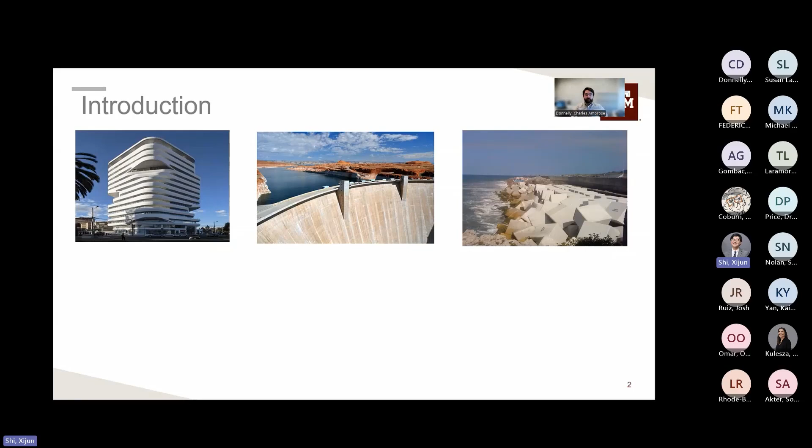As engineers, we're often focused on different structures that are key parts of our infrastructure systems, which affect the general public. These structures include buildings, dams, roadways, and coastal protection systems. A key component of all these structures is the materials we use to build them, and by far the most widely used material for construction is concrete. It's the most used artificial material in the world, with an estimated 30 billion tons of global production.

So any opportunity to improve concrete materials offers a great opportunity to improve the durability, performance, cost, and sustainability of structures, everything from a roadway to a building floor to a dam or levee section. So any opportunity we have to focus on that is great.

One thing we know about concrete is that it often requires additional reinforcement, whether that's steel rebar or, in many cases, fibers in the concrete to improve overall performance. Fibers are a proven technology used for a number of benefits, including controlling cracking due to plastic shrinkage, enhancing flexural and tensile strengths, improving toughness for long-term durability, delaying the formation and growth of microcracks, improving post-crack ductility, and bettering impact resistance.

Fibers have been around for decades in concrete in a number of different forms, ranging from manufactured steel fibers, like the one shown on the left, to naturally forming fibers, or synthetic fibers such as plastic or polymer fibers used in different applications. One common solution is metallic steel fibers, like the one shown, because they've been shown to improve the toughness of concrete and are very effective in resisting crack development and propagation.

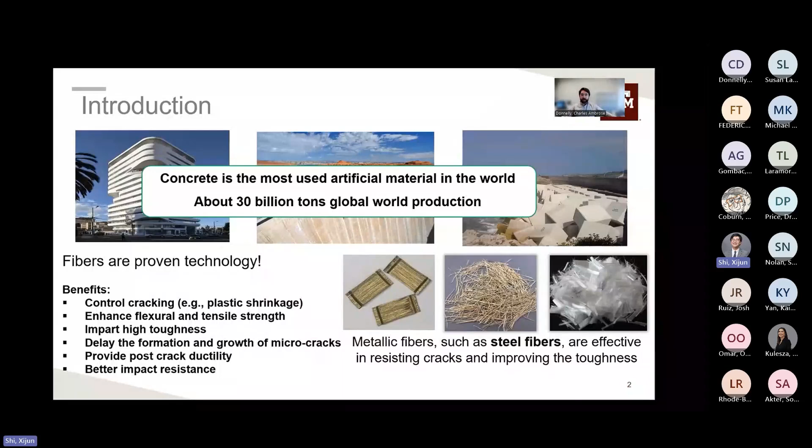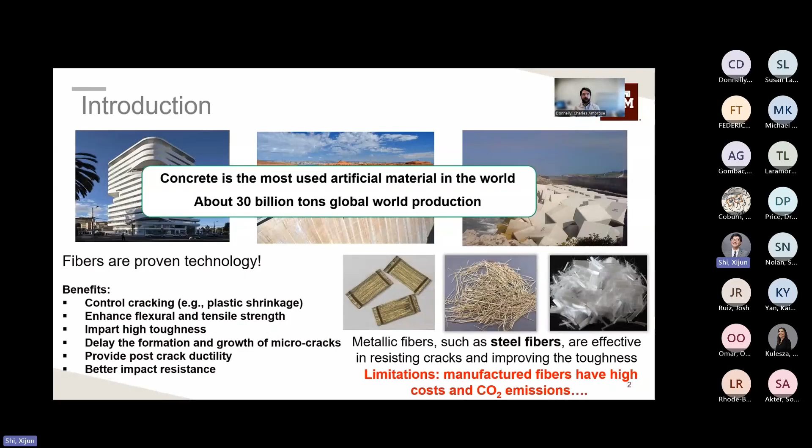Although fibers are great at improving many concrete material properties, there are some critical limitations, including the high cost associated with constructing sections with these fibers, as well as sustainability and environmental impact due to high CO2 emissions from steel fiber production. This is where Plient concrete comes in, because it offers a solution that utilizes the benefits of these fibers while mitigating some of the limitations.

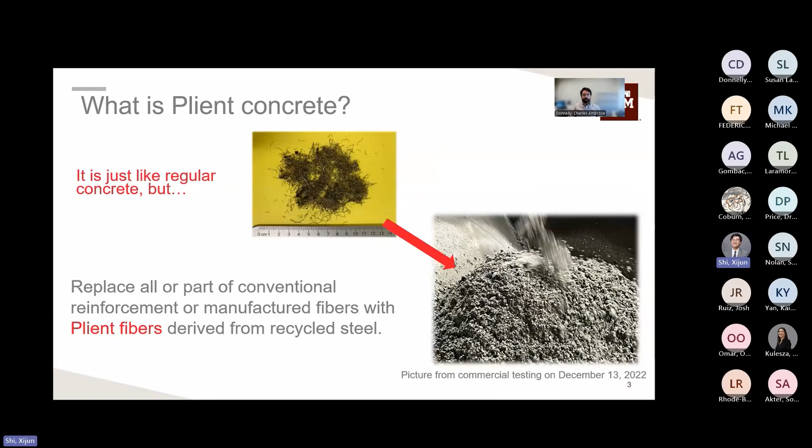So what is Plient concrete? Plient concrete is traditional or standard concrete which incorporates Plient fibers to offer all the improvements previously mentioned. Plient fibers are derived from a recycled steel product—here's an example of the Plient fibers—and they can be seamlessly integrated into traditional or conventional concrete to offer the benefits of different fibers.

So as I said, Plient fibers are a recycled steel product. Their composition is essentially almost entirely steel from the recycling process, but there's some residual rubber and textiles left over. There's a good breakdown on the bottom left showing a mass of the Plient fibers, showing fibers of different lengths and diameters made out of steel, with some residual rubber and textile interspersed throughout.

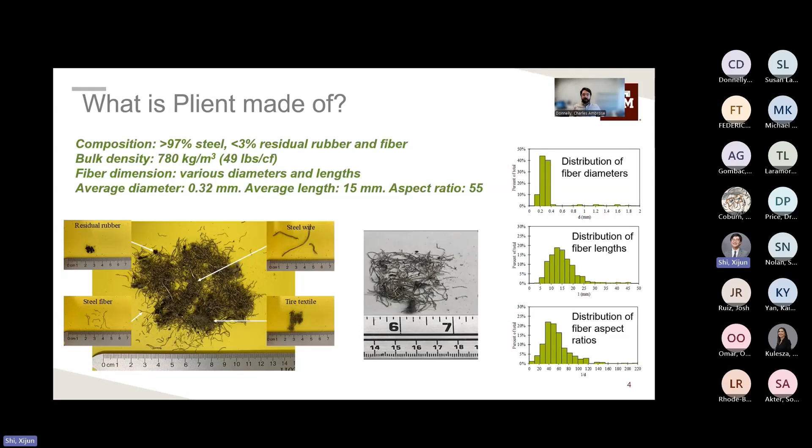Something unique about Plient fibers compared to a manufactured steel fiber is that, because of the recycling process, instead of a uniform length and diameter, there's a distribution of lengths, diameters, and therefore aspect ratios. So Plient fibers are an effective fiber solution for two key reasons, and both have to do with the interface between the fiber itself and the concrete or cement matrix.

The first reason is because of the recycling process, there's some residual rubber that remains on the surface of the fibers. There's a good image shown on the left, a zoomed in view of the fiber, and you can see the surface is coated with some residual rubber. What this residual rubber does is offer a texture to the fiber that improves the bonding between the fiber and the surrounding cement matrix.

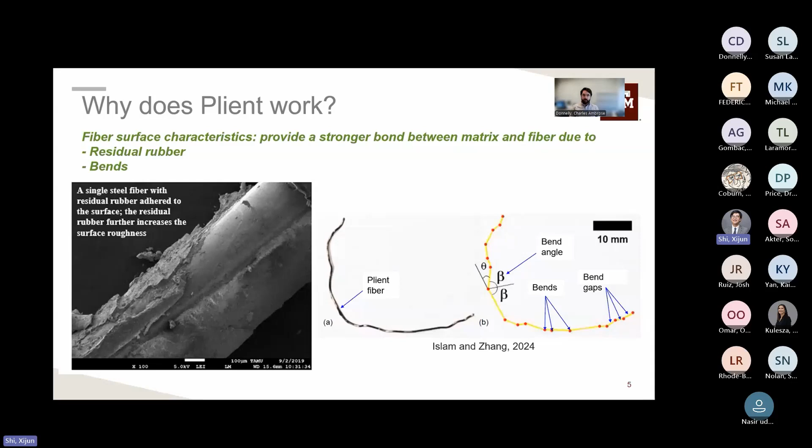The other reason the fibers work well is because of the bends in the fiber. Because of the natural recycling process, the fibers do not come out straight. There's some angularity, and these bends vary between fiber lengths. But the important thing is both the surface texture from the residual rubber and the bends improve the interface between the fibers and the surrounding cement matrix. This is key for the actual performance of the fiber, because improving the bond between the fiber and the surrounding cement matrix results in a better performing fiber that can achieve all those properties I mentioned earlier, whether it's improved strength, post-crack performance, durability, and so on.

So there are some key benefits of using Plient compared to standard reinforcement methods or alternate fiber techniques. First is a key question whenever you're introducing a new material: the cost. Plient fibers offer up to 50% less cost than conventional reinforced concrete, achieved by replacing rebar or mesh and stirrups in construction time with the recycled steel fibers.

Additionally, because it's a recycled product, the second key advantage is the environmental impact. Since this is a recycled product replacing manufactured rebar or steel fiber, there's 7 to 19 times lower carbon footprint associated with Plient concrete compared to rebar. Additionally, there's 15 times lower carbon footprint of Plient fibers compared to some manufactured steel fibers.

The third benefit is reducing the labor and time of construction using Plient fibers. In many structures that use rebar mesh or tied rebar, you have significant construction time associated with placement and tying of the rebar. By using Plient fibers, you're able to eliminate all of that construction time, thus speeding up the construction process.

The fourth benefit of Plient fibers is improved durability and long life of structures using Plient. Because Plient improves the cracking time, you get a much tougher and more resilient structure, and less degradation because of the higher impact toughness of the Plient concrete.

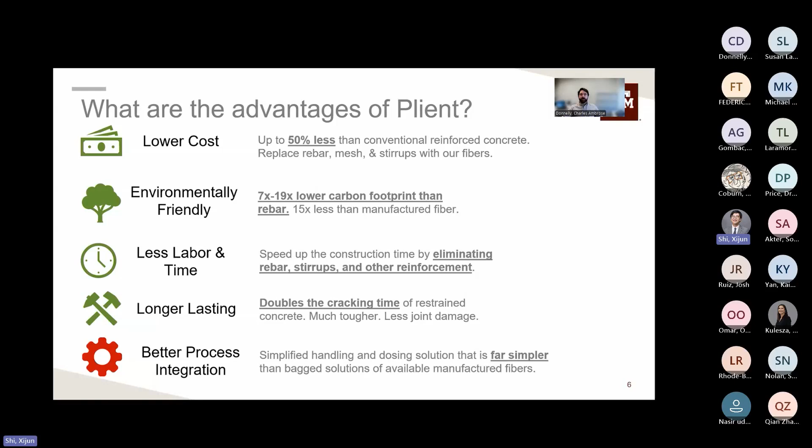Lastly, the final benefit of using Plient is improved process integration. Anytime you're introducing a new technology, a concern is how to integrate it into existing construction practices without necessitating significant changes. The benefit of Plient is that we're able to integrate this directly into the concrete, a simplified process compared to other steel fibers, which come in bags and require labor-intensive dumping of the bagged fibers into the back of the concrete truck. We're able to directly integrate the fibers and make it more seamless compared to other manufactured steel fibers.

Plient fibers have up to 19 times lower carbon footprint compared to alternatives, including rebar reinforcement.

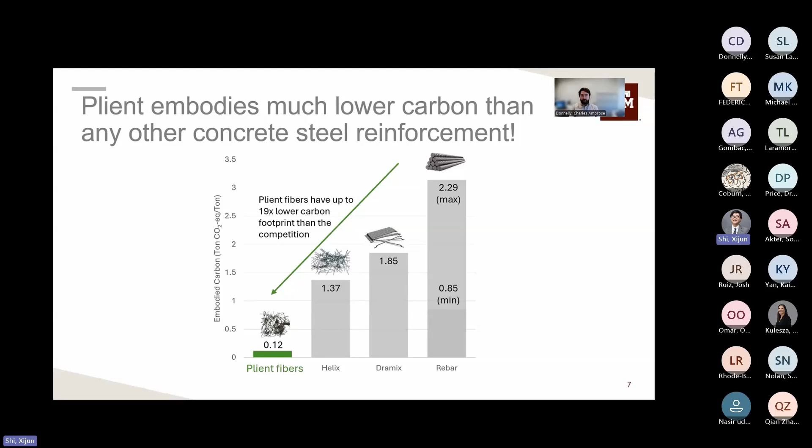I'm making a lot of claims about the benefits of Plient fiber, but I want to highlight that all of this research is backed by significant time and energy, over 4 years of lab development funded by agencies including NSF, ACI Foundation, NCHRP, and Texas A&M Innovations. These projects focused on evaluating the key material properties of Plient concrete to identify its benefits compared to alternatives.

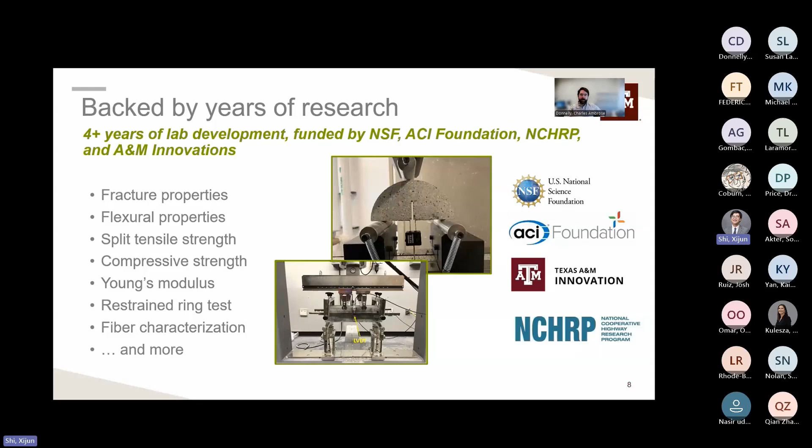The properties evaluated include fracture properties, flexural properties, split tensile strength, compressive strength, stiffness or Young's modulus, as well as crack performance and characterizing the individual fibers themselves. I'll go through some of these material properties and results to identify how Plient fibers and Plient concrete compare to traditional concrete.

The first area is pull-out strength. As mentioned earlier with surface characteristics, an important factor for any fiber is the bond interface between the fiber and surrounding concrete. Tests performed at Florida State University compared Plient fibers to traditional manufactured steel fibers, and using a fiber pull-out test, it's been shown that Plient fiber has 500% better pull-out performance. This is critical because as a crack forms and opens, the fibers hold it tight, improving long-term durability. By having higher pull-out performance, Plient fibers more effectively keep the crack closed and maintain the durability of the structure.

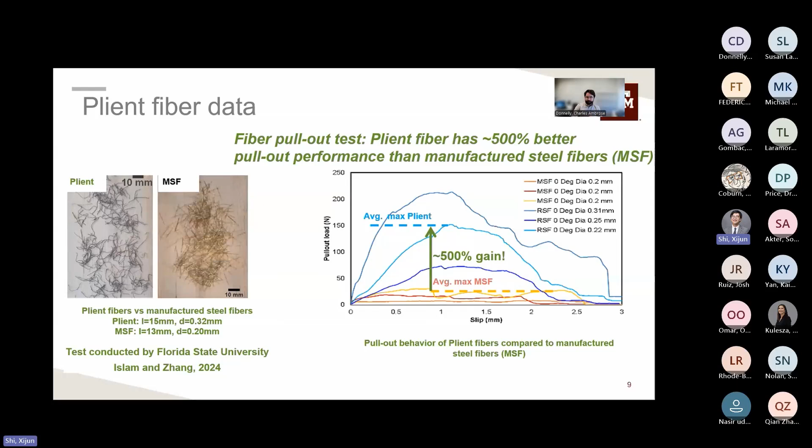There have also been tests evaluating the effect of Plient on different strength parameters: compressive strength (top left), modulus of elasticity or stiffness (top right), and splitting tensile strength (bottom). The key takeaway is that using Plient at different dosages can slightly increase compressive strength and has minimal effect on modulus of elasticity, but significantly affects splitting tensile strength. The plot shows that increasing from no Plient fibers to 1 or 2% Plient fibers results in as high as a 50% improvement in splitting tensile strength.

In a comparative study, the increase in splitting tensile strength was compared between Plient concrete and concrete reinforced with manufactured steel fibers. It was found that a manufactured steel fiber of similar size reported only a 37% increase in splitting tensile strength. So Plient fibers not only improve on standard concrete, but also outperform currently available manufactured steel fibers.

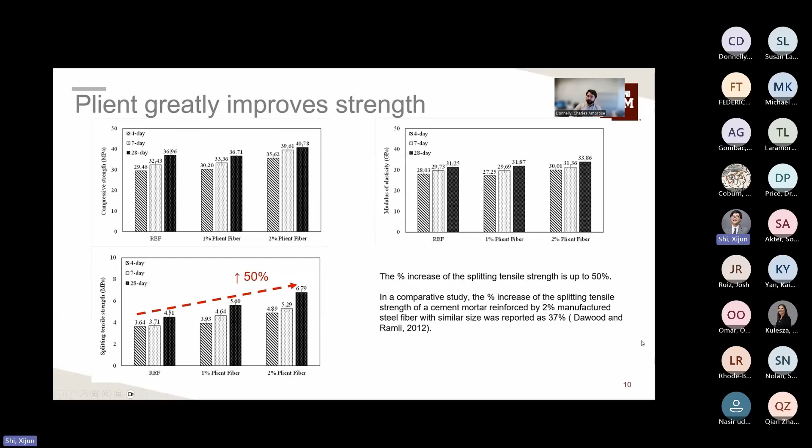A key area where Plient offers benefits is flexural strength. Concrete often fails in either flexure or tension, and for many construction elements such as slabs or beams, flexural strength is the critical parameter. Here are results from 7-day testing using C1609 beam tests. On the left you see the flexural strength test results, and on the right, the residual strength or post-crack performance.

On the left, increasing the dosage from a reference with no Plient fibers to as high as 130 pounds per cubic yard shows a significant improvement in overall flexural strength. Critically, comparing different dosages of Plient fiber shows significant residual strength achieved through using it. An unreinforced or zero dosage, not shown here, would have no residual strength—once the crack forms, the beam breaks. Increasing the Plient dosage to a certain point significantly improves the overall flexural and residual strength of the concrete.

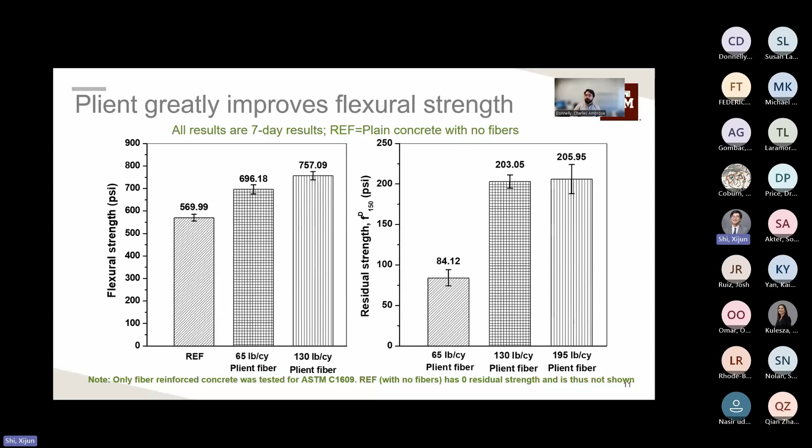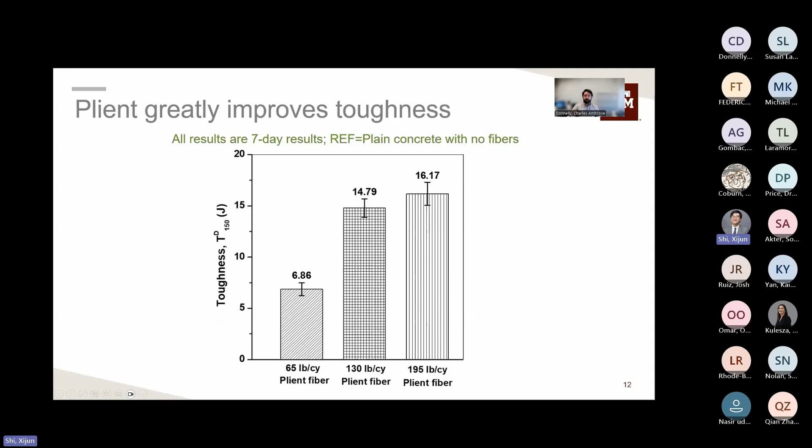Another area where Plient offers significant benefits is the toughness of the concrete. Concrete toughness is significant for long-term degradation of a concrete structure, for example pavement structures at joints, preventing spalling and ensuring durability over the long term. Improving concrete toughness is extremely beneficial for the structure's long-term durability, and increasing the Plient dosage offers significant improvements in the toughness of the concrete itself.

The last material property that was evaluated that I'm going to share is looking at shrinkage cracking. We know that as concrete is setting, there's plastic shrinking that occurs, and when restrained, as most structures are in some way, it leads to crack development. So the incorporation of Plient fibers is beneficial if we can reduce or at least mitigate crack development.

So a series of ring tests were performed. Essentially, in this test setup there's a central steel ring and an outer ring placed with a gap between the two. The Plient concrete is poured into the gap and allowed to initially set, at which point the outer ring is removed. There's a series of strain gauges on the inner ring which measure strain development as the concrete cures and sets.

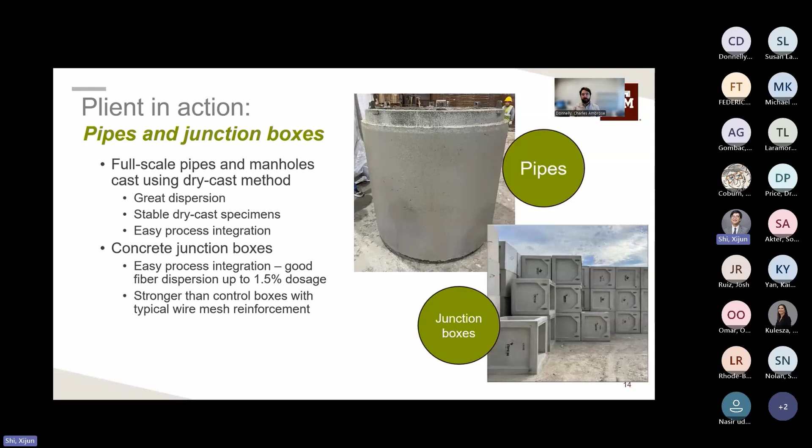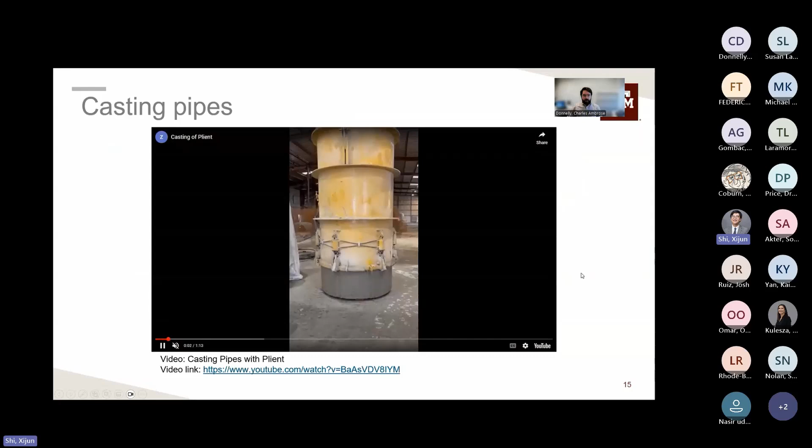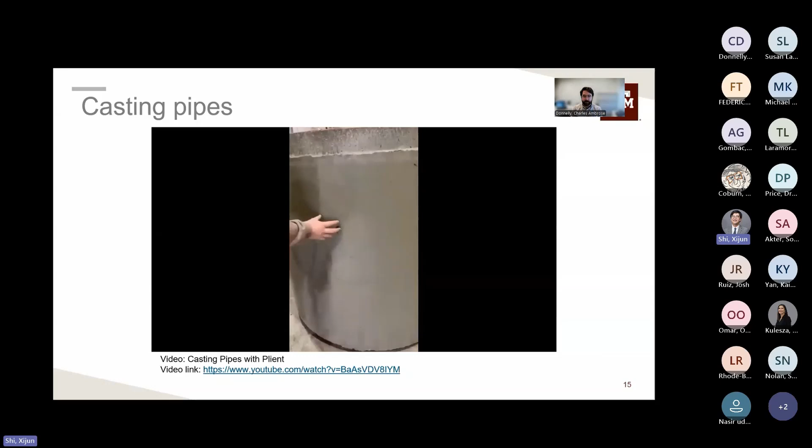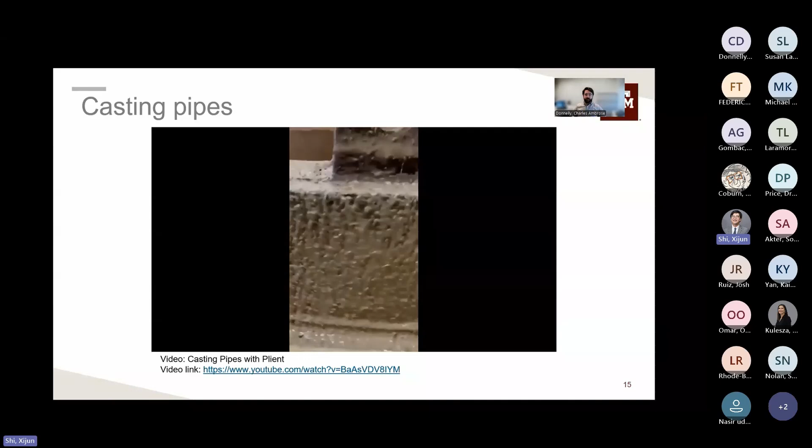Here's a neat video of the dry cast method of the pipe. This pipe is being constructed with Plient fibers integrated in, and as you get closer you'll see seamless integration of the fibers. Actually kind of cool—in the background you can see the typical cage or mesh that they would otherwise use for the pipes, which is eliminated by using the fibers. You can see there's no fibers on the surface—it's a stable construction with nothing sticking out. It was able to fully disperse and integrate. So Plient fibers were a huge success with these pipes, showing it can be easily integrated into that construction process.

The next area that Plient offers an opportunity to be integrated into is pavements and flooring. In standard or traditional slab on grade, mesh or rebar must be placed, which is time-consuming, costly, and labor intensive. But we found that Plient fibers can be integrated into this and cast using volumetric or ready-mix trucks with no adjustments to the construction process. The performance of these slabs is quite good despite heavy loads, and the finishing quality is excellent. We've conducted several pavement pilot sections constructed with Plient fibers, and there's been great performance shown from that.

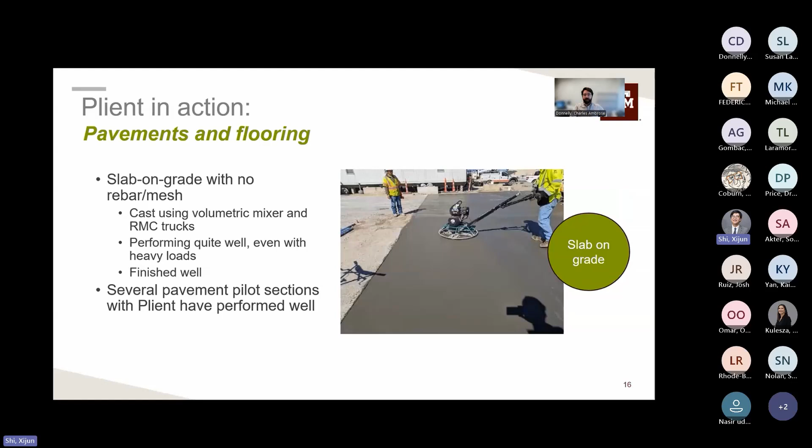So I want to share some videos. Here's some examples of them constructing a test section. On the left there is them constructing a test section right outside of a ready-mix concrete plant right here in the College Station area. One of the cool things about the way this was constructed was that they constructed two sections side by side.

One was constructed with Plient fibers, and the one directly adjacent, which is the one you see them constructing now, was constructed with traditional reinforcement. The benefit of this is being able to compare side by side Plient fiber performance and the standard traditional reinforcement method. Also, there's the same environmental conditions, and this is placed right before they're loading the concrete trucks, so all day you have heavy loads going over the slabs, so you get a lot of potential for degradation. So you can evaluate that.

So here's them actually constructing the slabs. You see this is Plient integrated in the concrete. You can tell that they're able to move the concrete around. We don't have any issues with dispersion or flaking or anything like that.

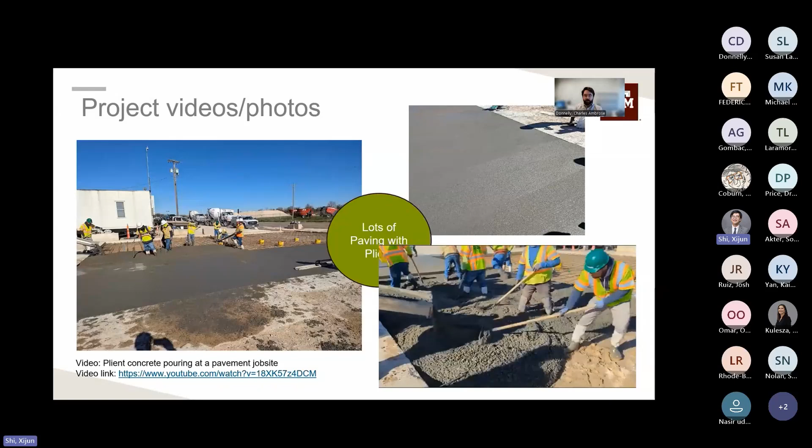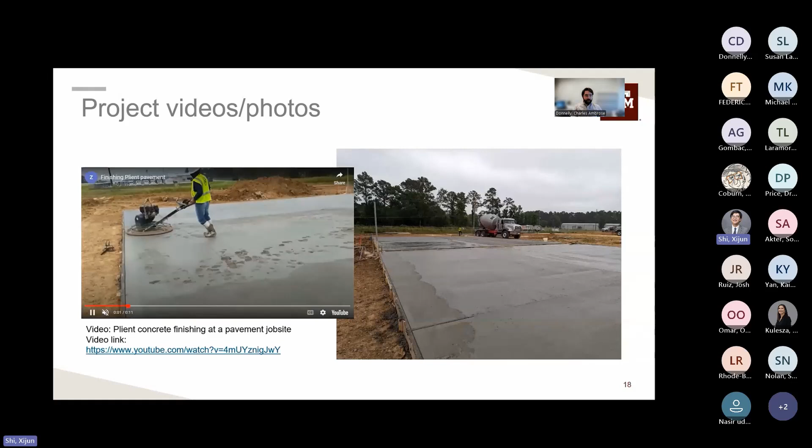The other benefit is that the Plient fibers do finish quite well using standard finishing practices. Here's a neat video of them using the power trowel and just going across the whole thing, and no issues with fibers sticking out or anything like that. You honestly can't even tell if the fibers are there.

So lastly, looking at some of our test sections that were constructed about a year ago. Again, these are the sections side by side with one another. The Plient reinforced concrete, in addition to being more cost effective and faster, we're seeing no degradation at the joints. You honestly can't even tell if the fibers are there. The Plient fibers have performed very well throughout the slabs. We don't see any slab cracking or loss of performance.

Directly next to it, on the other hand, is the conventionally reinforced pavement. We're already starting to see some joint spalling, and this is due to the lower toughness of the concrete. This is a real problem because over time that joint spalling is going to continue to get worse as the heavy vehicles go over it. So a really cool example of two different constructed slabs directly adjacent with the same vehicle loading, showing that the Plient fibers are performing great. A great opportunity to compare those two.

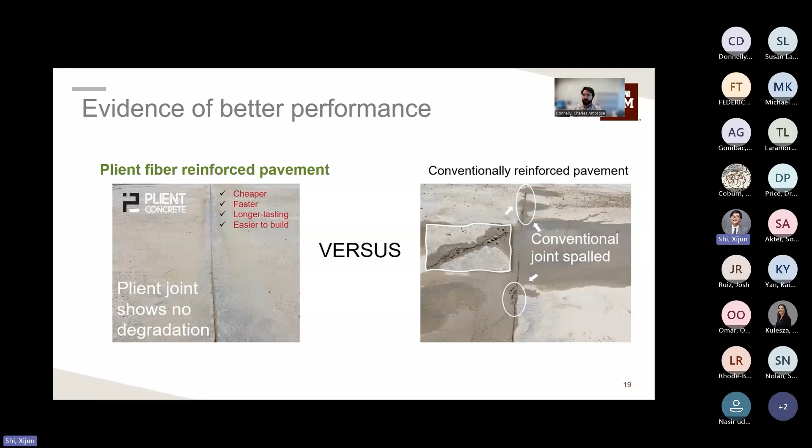So as I wrap up, I want to share some of the current work we're doing, looking at the Plient fibers and how we can integrate them. We're happy to announce that recently we were awarded an EPA SBIR project. It's a 6-month phase 1 project that just began in December of 24. The focus of this project is being able to develop pumpable mixture designs using Plient fibers. We're really focused on opportunities to seamlessly integrate the Plient fibers into existing construction techniques.

As you can see on the right there, oftentimes when they're constructing slab on grade or slab on deck, they're pumping the concrete. So we're demonstrating that the Plient fibers can be integrated into current construction techniques to be pumped directly on job sites.

The other area we're working on has to do with dosing systems. I mentioned briefly earlier that one of the benefits of Plient is it eliminates the need for dumping bagged mixes into ready-mix concrete trucks. What we're working on is developing a system that can integrate or dose out the Plient fibers directly in the back of concrete trucks, ensuring the accurate dosage of our fibers as needed.

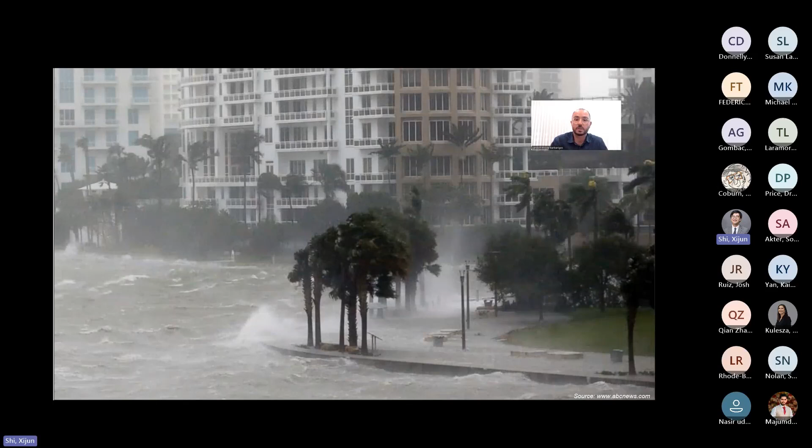However, we all know that living close to water, sometimes we have to weather the storms. This is a picture from Hurricane Irma here in Miami, and you can see the conditions are completely different. And we currently know that with climate change, storms will become stronger and more frequent, and we need to protect ourselves and our infrastructure from the impacts of these storms.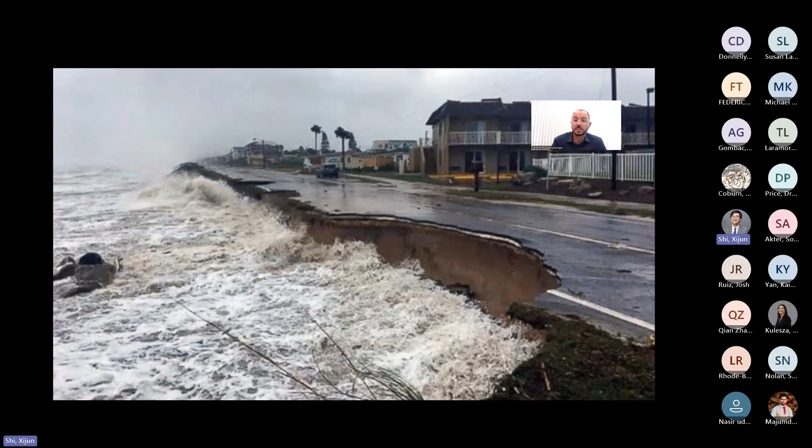Now, what is happening to the coastal cities is affecting, of course, the coastal communities. It's affecting the built environment and our infrastructure. And we often see pictures like this, where our transportation network, which is sometimes very close to the water and our first line of defense, is actually suffering from that.

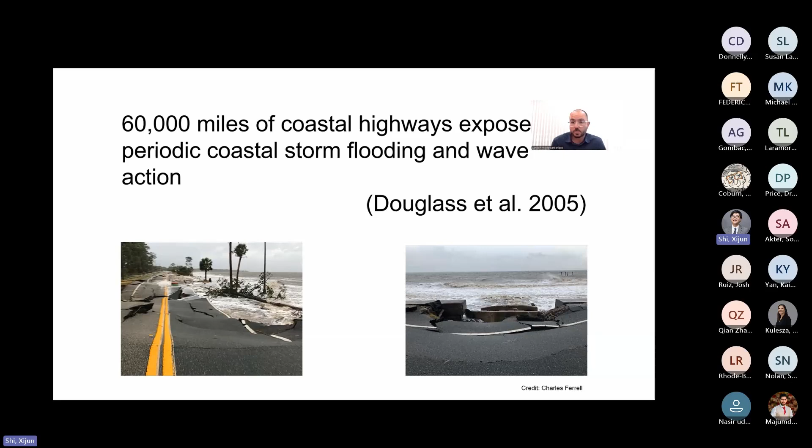So we know that more than 60,000 miles of coastal highways are exposed to these events. And these are some pictures from here in Florida, where we understand that we're in a vulnerable position and we should actually do something about it.

So the first thing is to understand the problem. We have three damage mechanisms. Flooding is one of the damage mechanisms that everybody understands - that's when the water comes in and we basically walk on water. And this is affecting both, can have some structural problems, but is also affecting our operations, the service aspect.

Erosion is when the sediments are removed, and this can cause significant problems in terms of instabilities. So you can basically lose structures. We've seen those houses and those roads, houses that are basically floating in the water, and roads and other works that are basically collapsing.

And there's also wave action, which is sometimes forgotten, but not always, in the sense that we have that impact load, that huge force that is being applied on our structures and infrastructure. The rule of thumb is that waves of 3 or 4 feet, repeated, can break a small house.

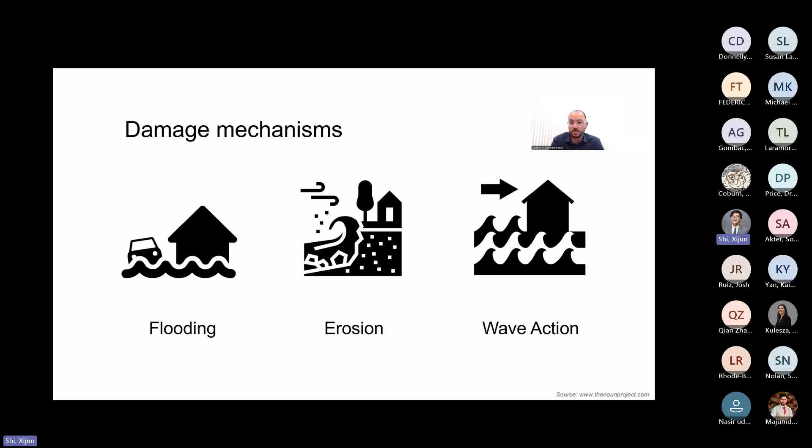So how can we protect ourselves? There are different philosophies out there. Right now, there's a lot of discussion about our gray infrastructure, how we can harden and protect the built environment and the infrastructure by creating structures like seawalls, breakwaters, that are basically human-made structures that will absorb that before it reaches our valuable infrastructure.

The other side is a more, I would say, soft approach, using nature-based solutions, local ecosystems. It can be seagrass, it can be oysters, corals, mangroves, and create basically natural spaces that will absorb that in a natural way.

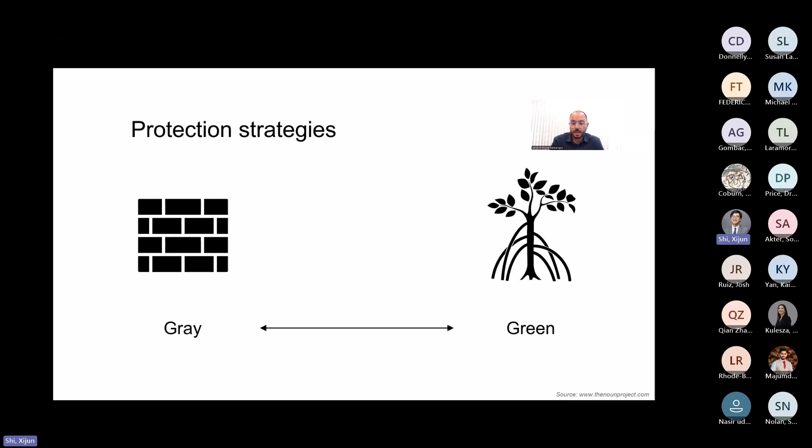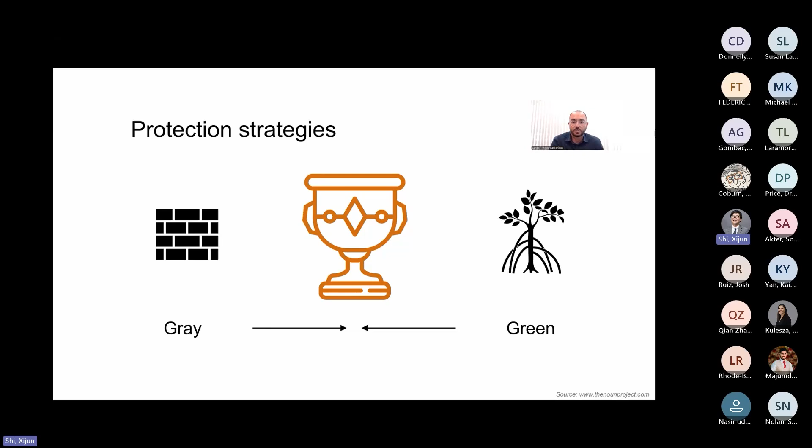Given where we are today, I would argue that the Holy Grail is somewhere in between. We need gray structures that work with green structures, so a green and gray hybrid solution that promotes basically habitat. And this is the design challenge that we're facing today: how can we design coastal protection and create habitat? This will, of course, take different shapes and forms depending on the local ecosystem, but also with respect to the needs of each community.

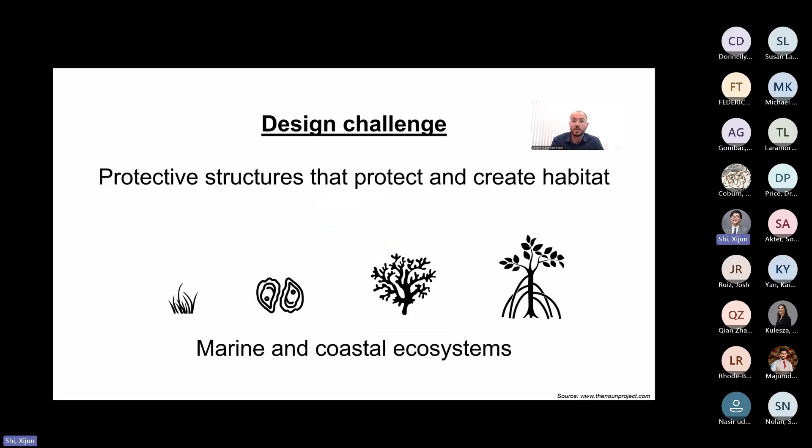Before I go into what we did with respect to SEAHIVE, I want to highlight why this is important. We know that green infrastructure and local ecosystems provide protection. However, to provide that protection, they need space and time. They need to establish, they need to grow. They also provide a lot of other benefits outside of protection, which are equally important.

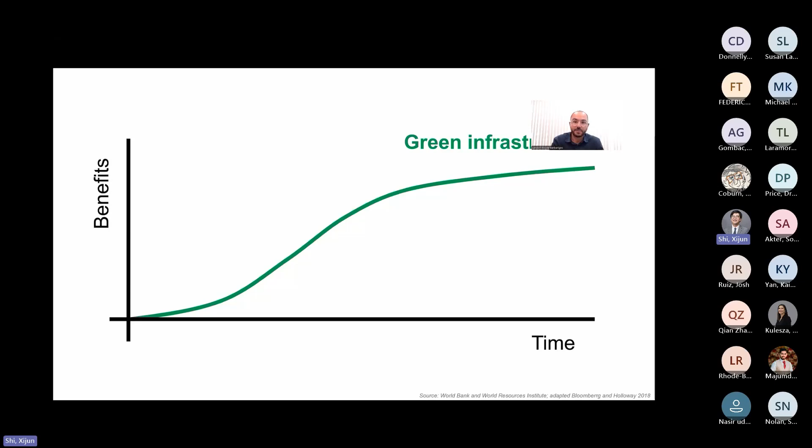But the problem is that right now we have this great need for coastal protection, and I argue we don't necessarily have the time to wait for this to establish. So a difference in the benefits is with respect to when those benefits of coastal protection are provided.

With gray infrastructure, the moment we finish construction of a project, we get that layer of benefit. However, we know our infrastructure is degrading, and it's inert to a certain extent. So if we could provide structures that have that gray component and ensure we get that protection from the day the project is finished, and then accommodate a local ecosystem and have growth inside our structures, providing biodiversity, regeneration, and habitat, that would be the best of both worlds.

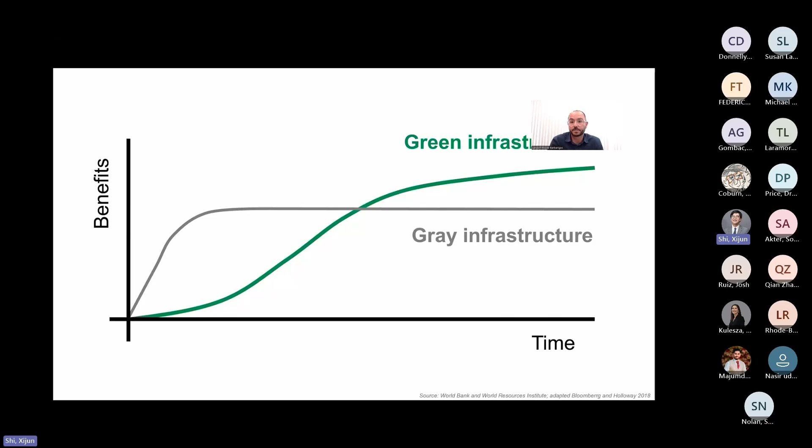The problem we're facing is that historically we've been designing thinking about people. We put ourselves in the center as a design driver. So when we design structures, we think about what we like and how we operate. The forms we take align with our needs. The materials we use are based on those forms and how we interact with those structures. And of course, the forces are linked to those things.

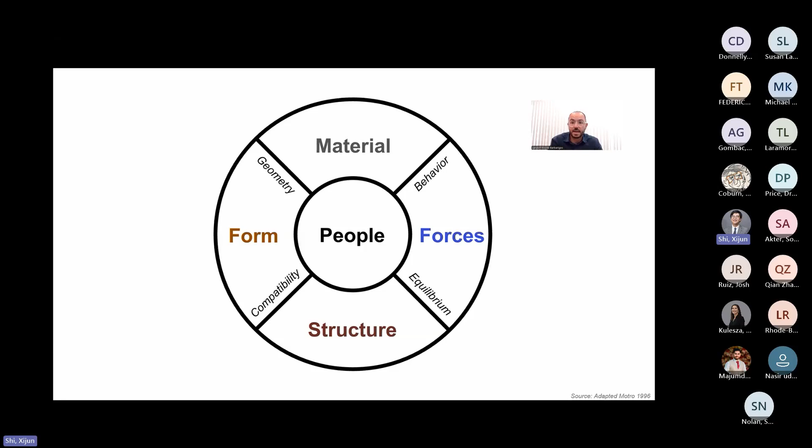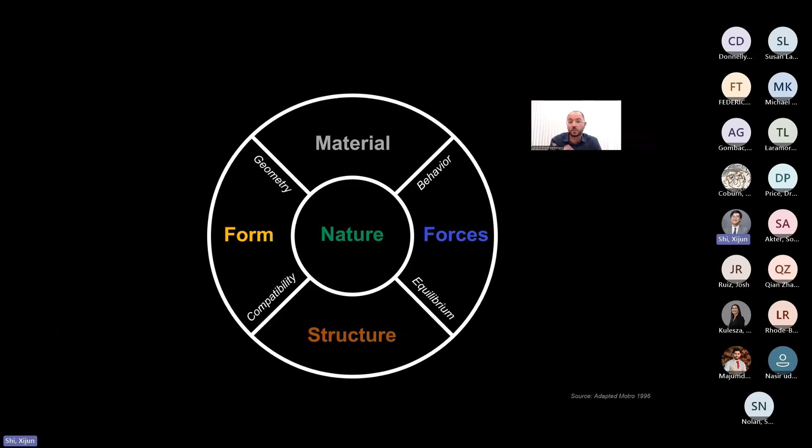Now the paradigm has to change because nature has to become the center of this. We need structures that work with nature. That means forms that align and work with nature, materials that can accommodate and provide growth to nature, and of course the forces have to abide to this.

This is what we focus around SEAHIVE. SEAHIVE is inspired from nature in the sense that we use the hexagonal shape of the beehive. We use hexagonal reinforced concrete units to protect ourselves from the impacts of the waves and water.

The use of the hexagonal shapes is very important for us. It provides not only protection but also a smart way of using the materials. The hexagon is one of the three geometries that provides a continuous tessellation, so when you put hexagons together there is no gap. This is very important for stability purposes. It's a stability issue, but it's also a very sustainable way of using the material because we maximize the empty space. The hexagon gives you the maximum volume for a given amount of material.

Our units are made out of concrete, as you can see on the upper left side, and we have perforations on the side. Those perforations allow the water to go into the system, and it doesn't reflect back the energy of the waves. The wave goes in, the water goes into the system, spins, creating turbulence, and basically we absorb energy within the system.

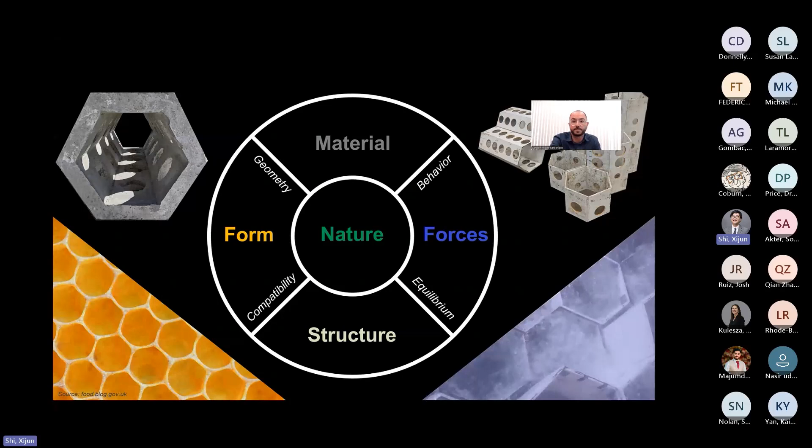So this is the history of SEAHIVE. We started in 2018 with federal funding from NCHRP. Throughout 2020 we were doing tests in the tank to develop the concept. In 2021 we secured some pilot projects here in South Florida, and now we're working on concluding those projects - there are some still in progress.

Now, what is interesting for us is that we had this collaboration with local communities that are looking for solutions. At the same time, we were lucky to intersect with other projects from inside the university, but also outside, like the DARPA REEFense Project and another effort, the Army SBIR on 3D printing. These are projects that overlap with SEAHIVE or use some SEAHIVE component, and they show how this project has grown organically. Right now we're seeking different components of that research and development in various fields, including our own sensor.

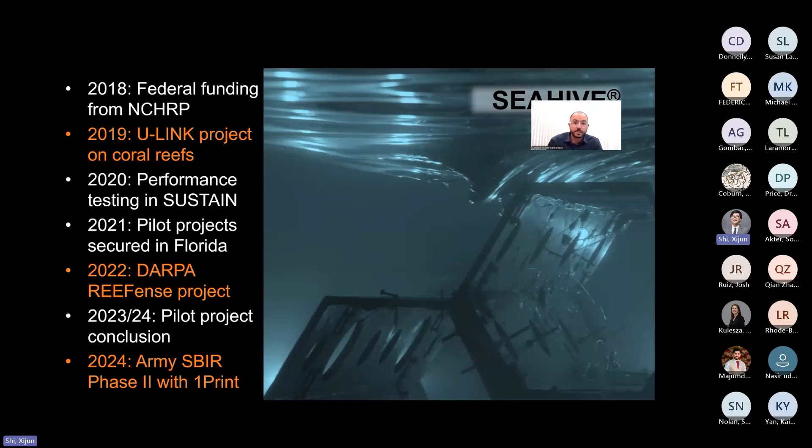Now, we started with testing different shapes. So we had here a square, a circular, and a hexagonal cross-section. And we did different patterns from solid to perforated.

With the perforation, we tested basically different perforation percentages, but also different patterns to absorb that perforation. So you can see here there's of course a solid version, one with small perforations, one with large perforations, but also combinations that give you the same percentage of voids.

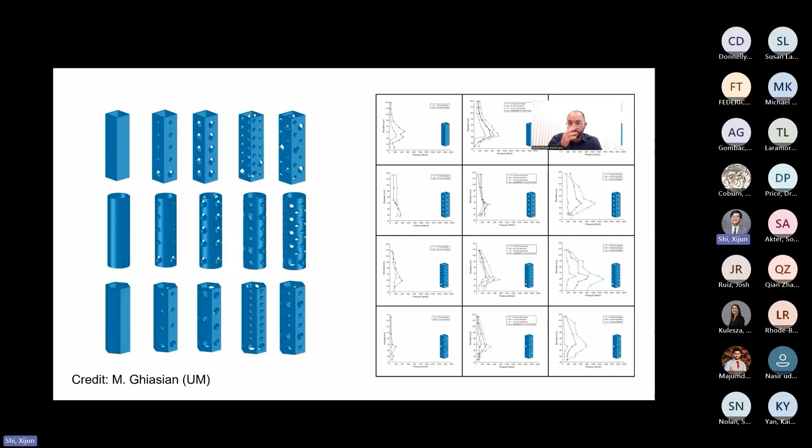What we were doing is measuring the impact of the design and the perforations in the interaction with the waves. We did testing in the tank of the system. So what we did is we created mini walls and mini reefs made out of the SEAHIVE, and we were throwing waves and doing water level measurements before and after, sometimes, or just before, to assess the performance of the structure and the interaction of the structure.

What you see here is part of our testing for a seawall, a step seawall with SEAHIVE vertical elements. And what we were measuring is how much reflection we have. Reflection is important because sometimes it amplifies the negative effects, but also causes scouring and other issues. And sometimes we're doing testing with respect to the energy dissipation.

The fact that we have a hexagonal prism basically reflects in multiple directions. And of course, we also absorb with the perforation some of the energy inside the system, as we were discussing before. So this reduces the energy that bounces back.

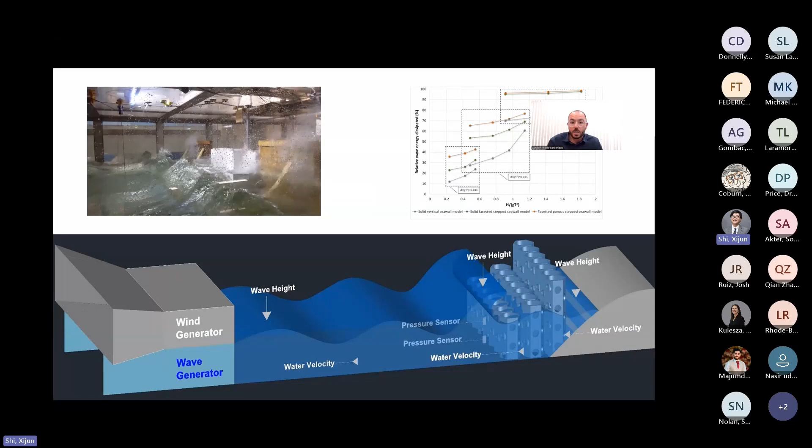So we started thinking about this, and we started other applications also. We can do submerged structures like breakwaters. And we did a comparison of a SEAHIVE variant with a trapezoidal reef.

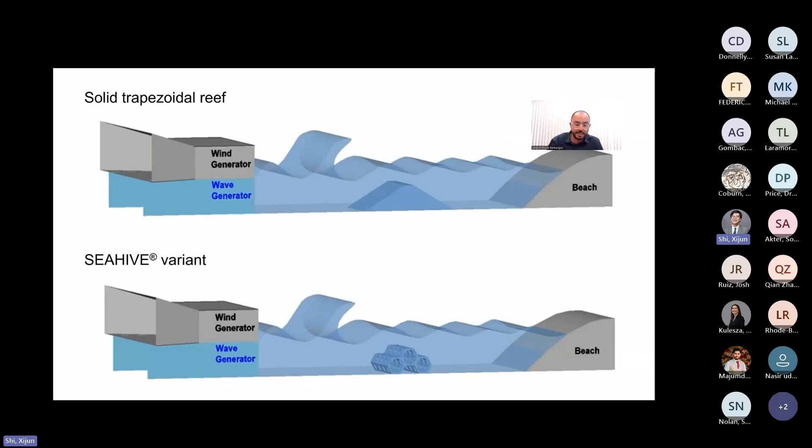There we were assessing how much of the energy is absorbed by that reef. Is it inducing wave breaking? And what is the energy inside those perforations?

As I said before, we had the chance to have this collaboration with our local communities here in South Florida. And one of the projects with one of those communities was SEAHIVE. SEAHIVE was a University of Miami ULINK project funding in collaboration with the city of Miami Beach.

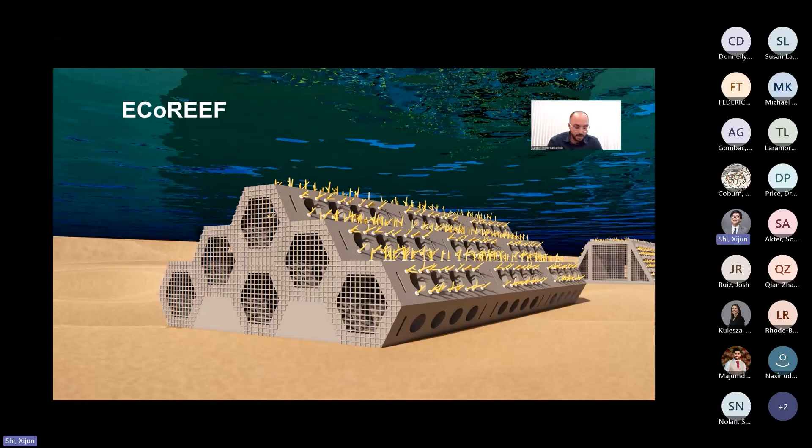This is a picture that we made where the idea was to create an artificial breakwater populated with corals. The idea here is about artificial coral reefs and using them to not only promote restoration, but also protect the coastline. So SEAHIVE was actually a pilot project that was made real.

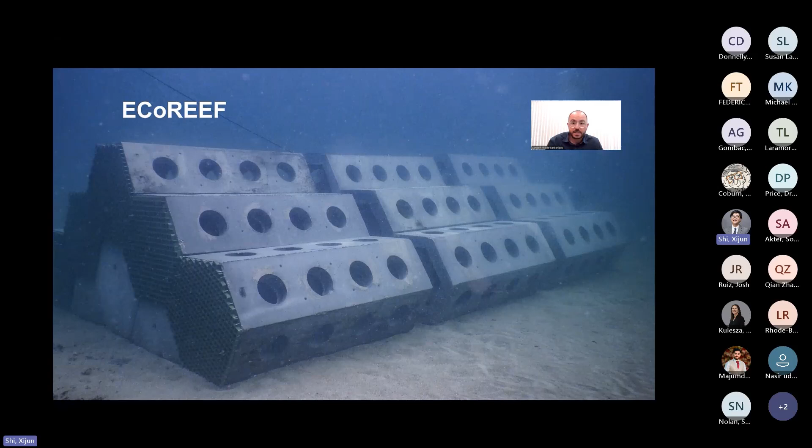And this is the picture of the SEAHIVE units, the first day of the deployment. You can see that they're very nicely stacked, very clean, very nicely put together. This is offshore of Miami Beach, just at a depth of 14 feet. These structures have now been there for almost 2 years, close to a year and a half.

And these are some pictures that were taken recently. My colleagues call them a lot of times fish aggregation devices, in the sense that fish love them. They love that macro scale complexity that is created with the perforation.

And we also use those structures to make local measurements of the waves. So we had a campaign with different instruments to see the absorption of the waves and the currents around them. The structure is, of course, small, so we have to do very localized measurements, but still they satisfy the purpose of the experiment, which is to see both the impact of the corals and the growth of corals on them, but also what is their impact on the waves and the water around.

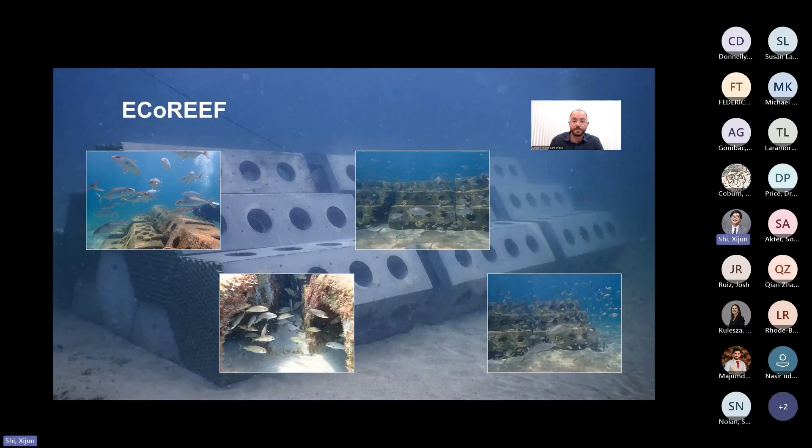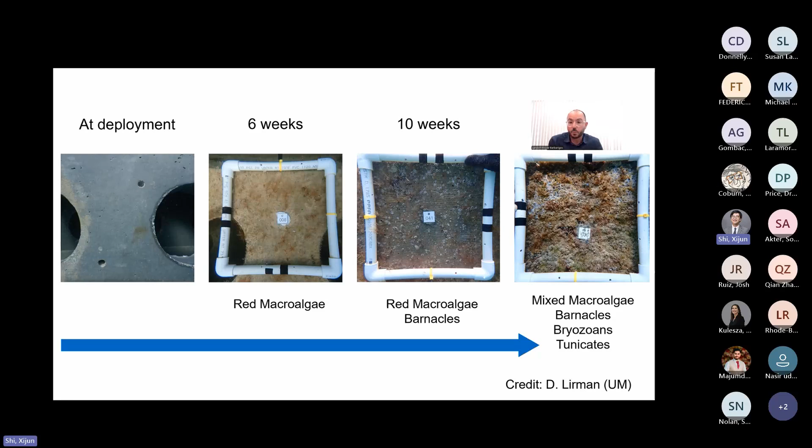So we've been monitoring not only the growth of corals that we transplanted, but also the different recruitments on the surface. And sometimes these are even competing with the purpose of the coral growth. When it comes to corals, we were actually planting more than 500 corals on this, and we've been measuring the mortality and growth of those corals.

So we can actually, when we want to combine gray infrastructure with green infrastructure, what we combine and how we combine things is equally important.

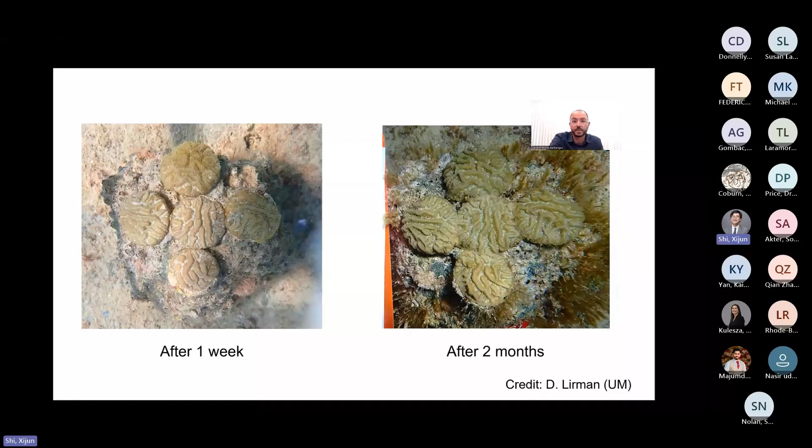SEAHIVE is not only for breakwaters. We had the chance to co-design another pilot project with the city of Pompano and Broward County and a local nonprofit, Shipwreck Park. These are our collaborators in the project we call Wahoo Bay. Wahoo Bay is a marine park for educational and research purposes, and it includes an artificial living shoreline.

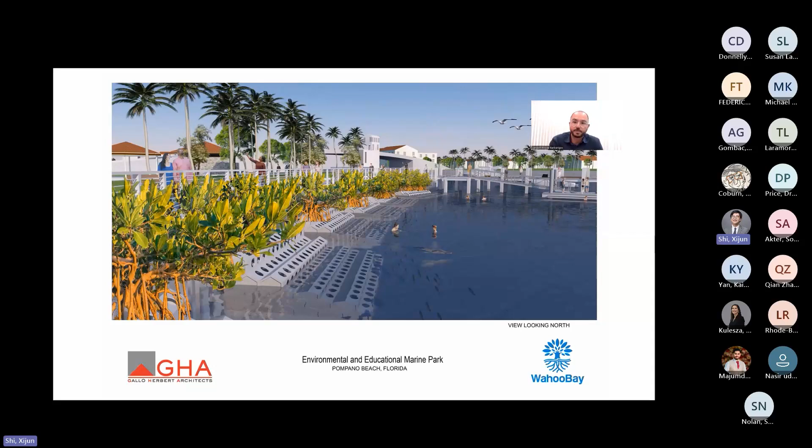The idea was to use the sea hives to absorb the impact of the waves and protect the park next door, but also to host mangroves. The project started with a different idea. They were envisioning 10 feet diameter culverts that would accommodate the mangroves. But we had an interaction with them, and our visions aligned so well that they allowed us to co-design the park with them and use SEAHIVE.

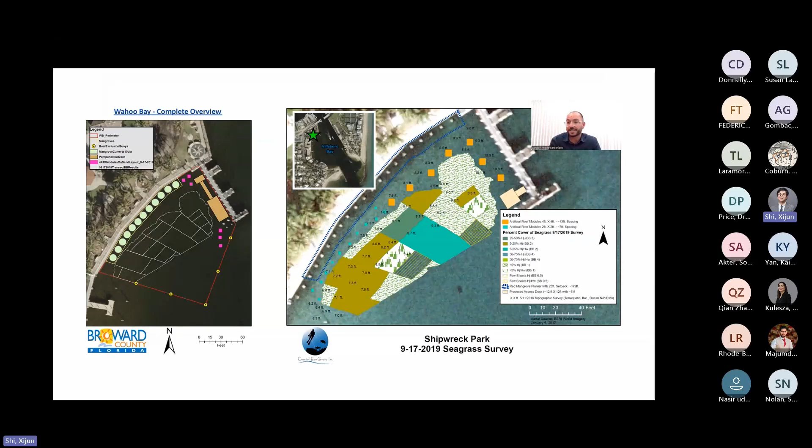What you see here on the right side is also the survey of the site, which includes seagrass. So we have some restrictions with respect to the extent we can go in the water. These are important parameters because they highlight the usage of the system and the advantages of the system, which does not necessarily require a full footprint for stability purposes. So SEAHIVE has some advantages when it comes to that.

So this is what we proposed for the SEAHIVE. It has a component which is submerged, and then on top you have basically those units that accommodate sediment and will host the mangroves. The top unit was designed so that it lies between the mean high water and mean low water in the intertidal zone. So it's kind of optimized for mangrove growth.

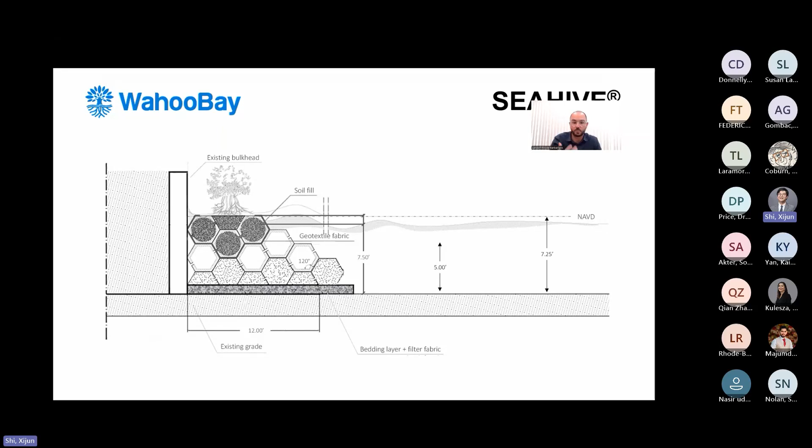Co-designing with the local community is very important because we also need to communicate the research and its aspects. So designing and transferring technology are two challenges that occur at the same time, but maybe not of the same nature. We've been working on communicating what we're trying to do to the local community and the general public, and we started with some of our students on how we do that.

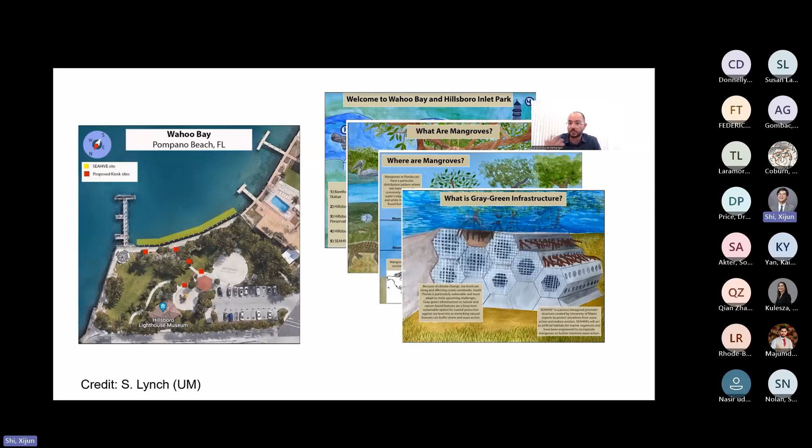There was this study about how to communicate what we're trying to do at the local park through a series of visualizations and drawings, creating a path that guides you on where we are, what the mangroves are, where they're positioned and why we find them there, what the gray-green infrastructure is, how climate affects things, and what we can do as citizens.

SEAHIVE has these hexagonal units that kind of sit into one another, so it's easy to deploy, with ideas we currently have for clustering and creating larger units that include multiple SEAHIVEs connected together. This could be even easier, but having that process in mind, understanding local conditions, and testing allows us to be confident about our project, while also seeing the materiality, the scalability, and the robustness of the system, both at the production and deployment level.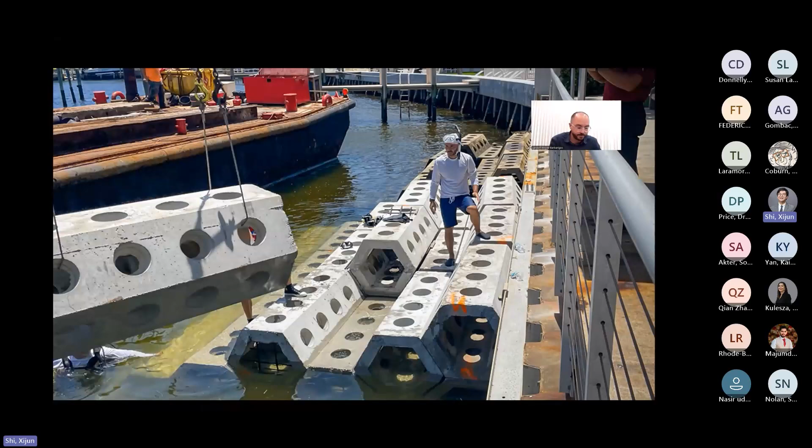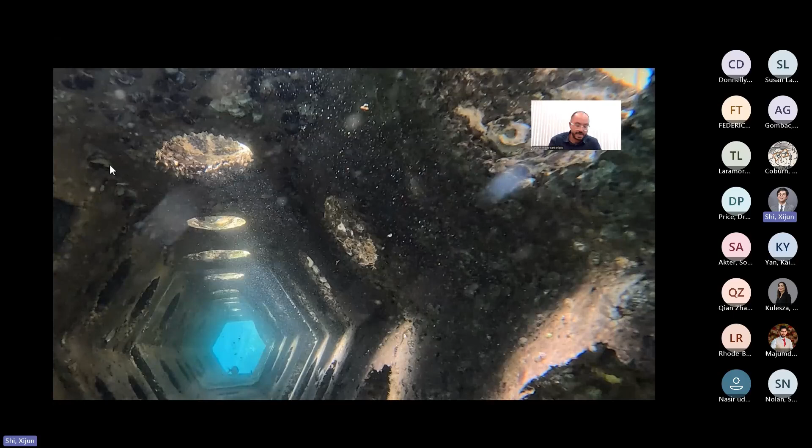This is a picture from inside one of the Wahoo Bay SEAHIVEs, taken from the county. This was to report the natural recruitment of oysters at the site. And we do some surveys, pre and post, of course.

And here this survey is about the fish. We can see that post-installation, we have a lot more fish at our sites. We have two control sites, one directly next to our deployment and another in a neighboring community. What we are trying to assess is that habitat creation aspect. So we're not only looking at the performance in terms of protection, which we'll do in the lab, but also with measurements of wave energy on different sites, and also how we can claim habitat.

It's early to say, so we will need at least a minimum of 2 or 3 years of data to claim that we did a good job in terms of habitat creation. But these are already good signs of this.

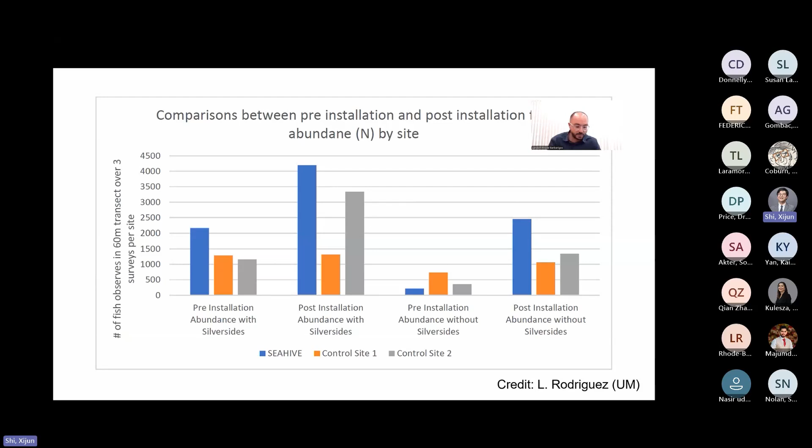Now, this is the other part. We started planting the mangroves. These are propagules that we're planting on the top. You can see here we filled some of the gap with sediment. There's a fabric there that allows the sediment to stay in place, but also allows the exchange with the water. We're still working on that. There are some challenges that we didn't anticipate, but we're learning a lot.

This is the important part with the pilots. Having pilots with the local communities allows us to assess different aspects from the regulatory, permitting challenges to the implementation and construction and other aspects. It's very important for us to assess what is needed in order to create those sites that guide the development, the research and the development of any new technology.

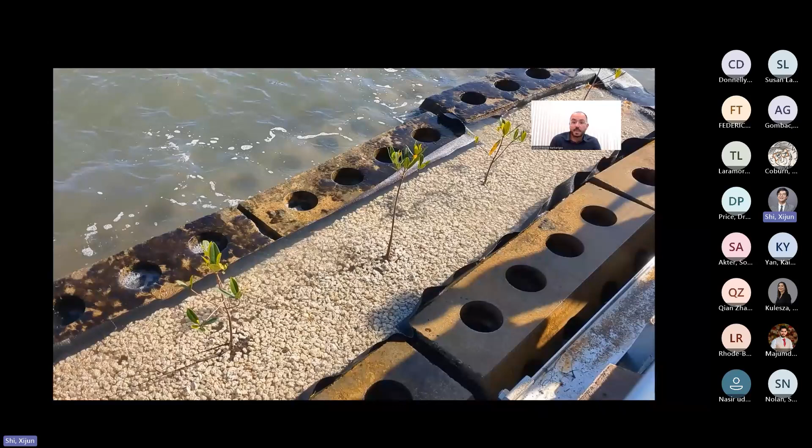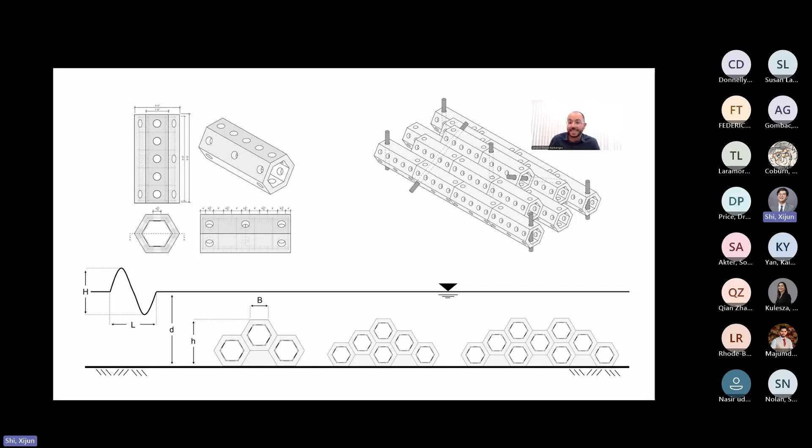Now we have some new projects and new ideas in the making. This is one of them. First of all, we parameterized the design of the SEAHIVE, and we also created some hybrids. This is a SEAHIVE where each side of the hexagon has a different composition of perforations, so with one unit we can create different facades of the design. We can also run piles, which allows us to enhance the stability if needed at certain sites.

At the same time, we've been continuing to do testing. Here are some tests that we did for the DARPA project. You can see that we have a breakwater with 6 SEAHIVE units. This is at the 1 to 20 scale.

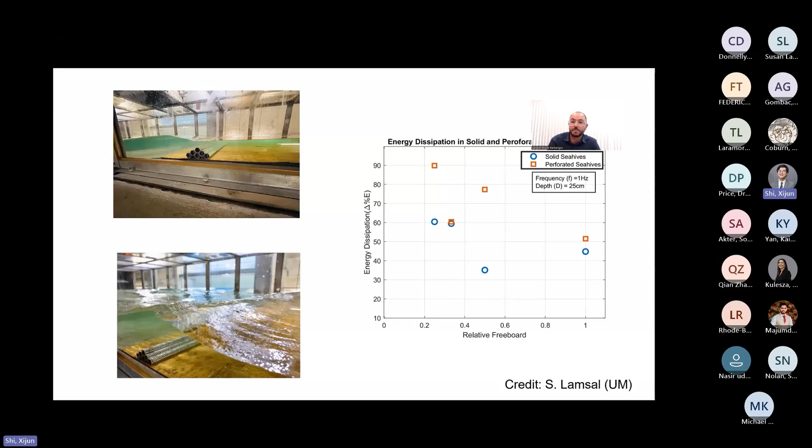And what we do every time with our SEAHIVE project is we run the perforated and the solid configuration. This is because we know that through time, with habitat creation and sediment accumulation, the perforations might get filled, so the performance depends on perforations. Our perforations enhance wave energy dissipation, but our lower bound will always be the solid. By running the solid versus perforated at different conditions, we can assess that variability in performance, so we know our lower bound and upper bound.

We also have been doing testing with respect to multiple rows and different configurations to assess how the performance of the SEAHIVE systems we propose can change. Here you have some reef units at different spaces, and we have work coming out with respect to the parameterization of this.

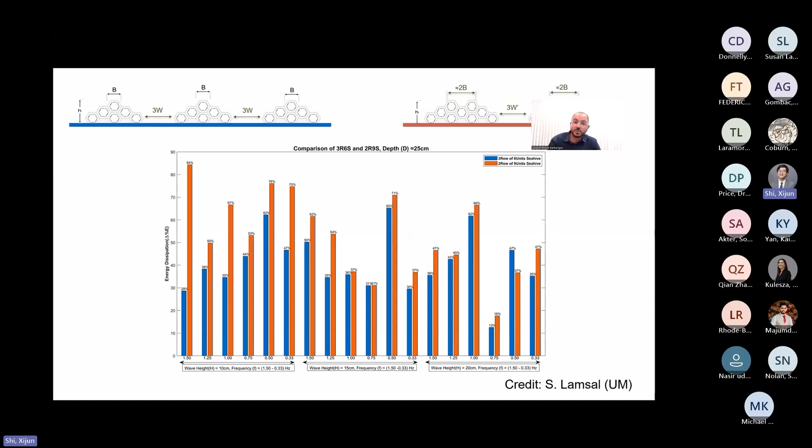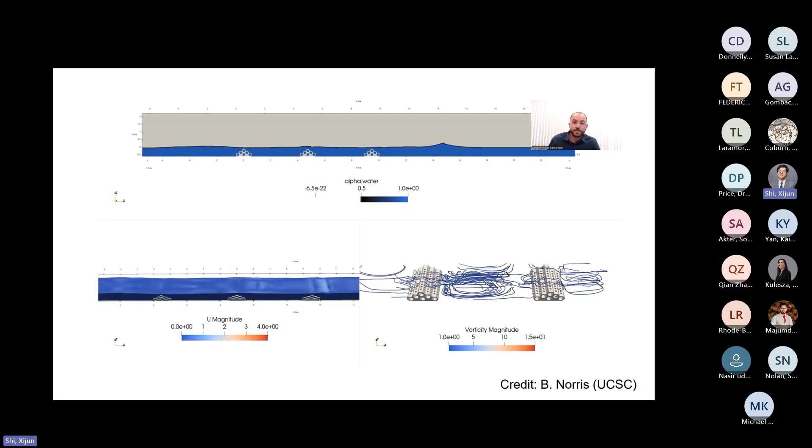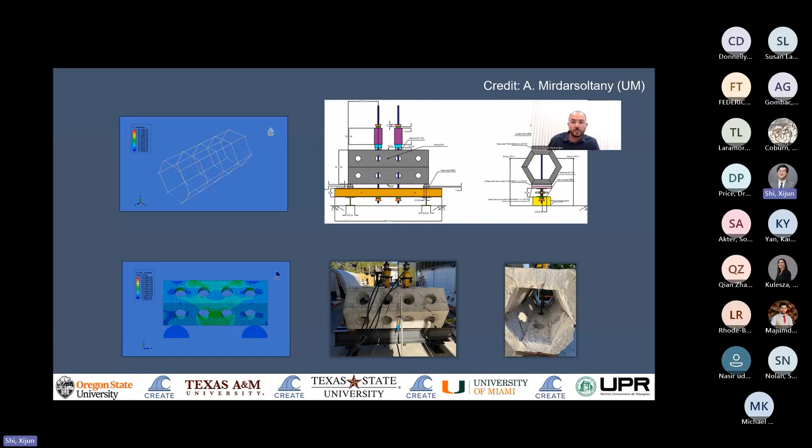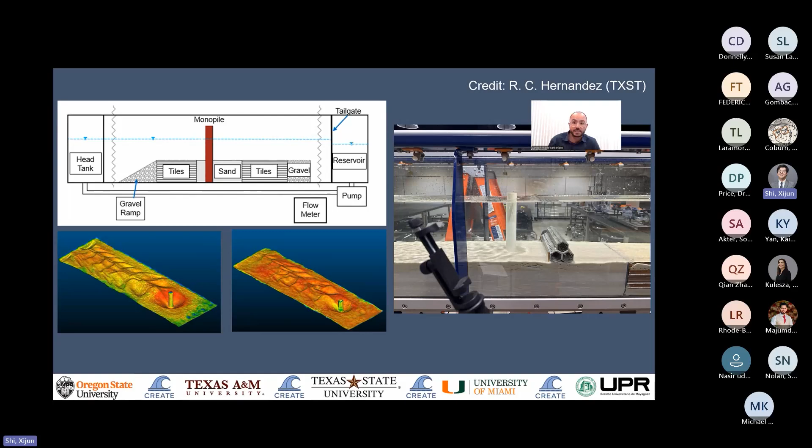At the same time, there's been this idea of using SEAHIVEs for scouring. This is work in collaboration with Texas State, and what you see here is their work comparing a SEAHIVE with a monopile, but also extending to a SEAHIVE system. We might need to make some design adjustments for scouring protection, but the preliminary results we've seen are promising. This is a work in progress.

Now, as you understand, this is a very large project. It started with the investment of TRB from the SEAHIVE project and the collaboration with the Florida Department of Transportation, but this has extended and reached way beyond that. This is a collaborative project, and a lot of players and organizations are involved. I would like to thank everybody, and of course our collaboration with the Florida DOT and the center here is promoting this further for future endeavors. Thank you.